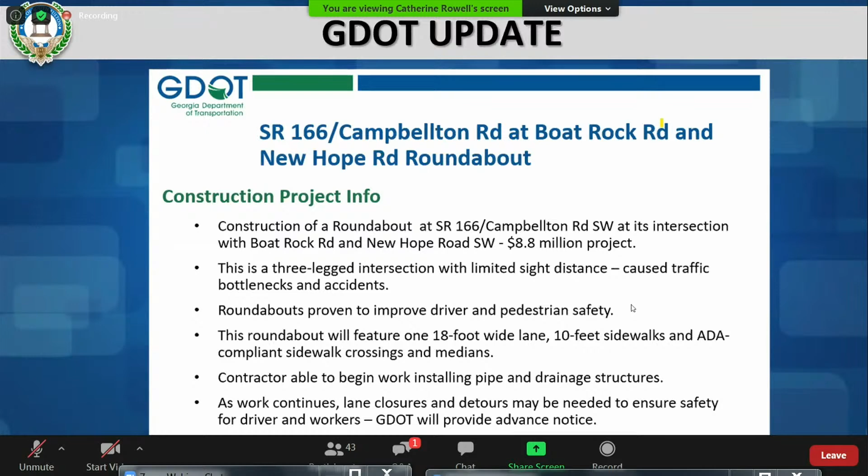Next slide, please. On State Route 166 in Campbellton, the recent progress has been grading in the roundabout area. Mostly we've been installing GAB and putting subgrade in that area to bring it up to grade for stage 1. In that area, we have closed off the decel lane traveling westbound leading to the intersection of Boat Rock Road, just so we can get in that area and install GAB.

As far as underground utilities, the gas company, Diversified, has completed most of the underground work on State Route 166 going eastbound and westbound. They're currently still working on Campbellton going towards Phillip Middle School. AT&T just started last week as well, working on underground utilities. They have a number of underground utilities to address, mostly on State Route 166 at the intersection of Boat Rock and Campbellton.

As far as the power poles, Georgia Power and East Point Power have completed all of their poles on Campbellton. Georgia Power just completed most of their poles last week, and they are completely done. Now we are just waiting on AT&T and other utilities to transfer their lines to those new poles. Next slide, please.

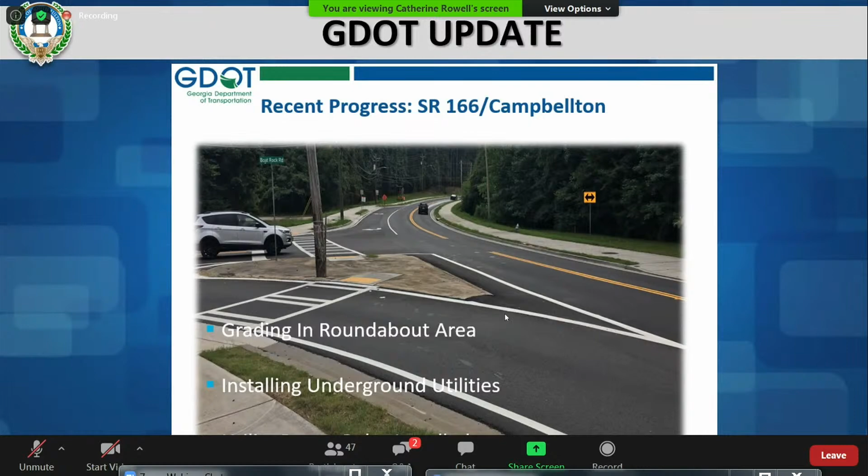These are some of the progress pictures we've been taking on Campbellton. On the left is the decel lane that was cut off so we can put our GAB in that area. Next slide, please.

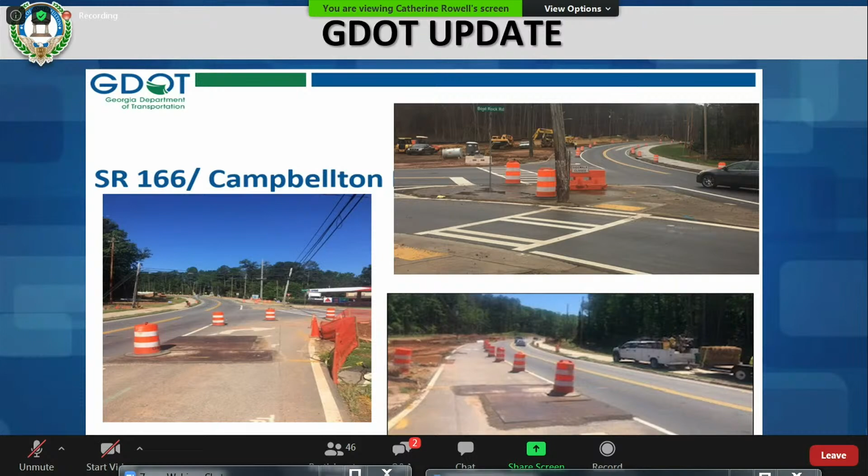Boat Rock, the recent progress we've done, was the first road we started construction on. We have installed sidewalk, curb and gutter, and a couple driveways on Boat Rock as well. Mostly we have the subgrade and GAB complete in that area. The only area that hasn't been done yet is the area that leads to the roundabout between New Hope and Boat Rock Road. We've been doing a good job of keeping this area covered, mostly because we've been doing a lot of grading, so it's a lot of dirt work.

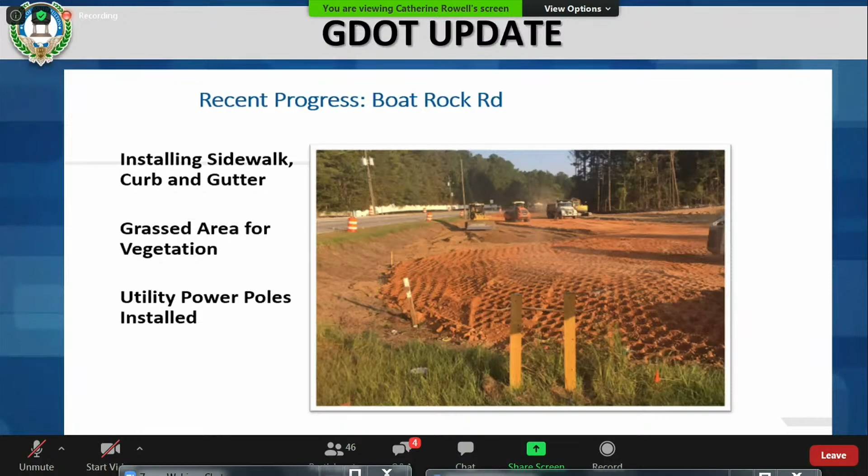So we've been doing our best to keep this area vegetated. Two weeks ago we put permanent grass in the area heavily, and I saw today that we have grass in that area. That's good, especially for this upcoming rain, to keep erosion down. The utility poles on Boat Rock, I believe, have all been completed, so there won't be any more lane closures on Boat Rock or New Hope. Georgia Power installed those poles, wood poles and concrete poles. They are currently done; there won't be any more need for them.

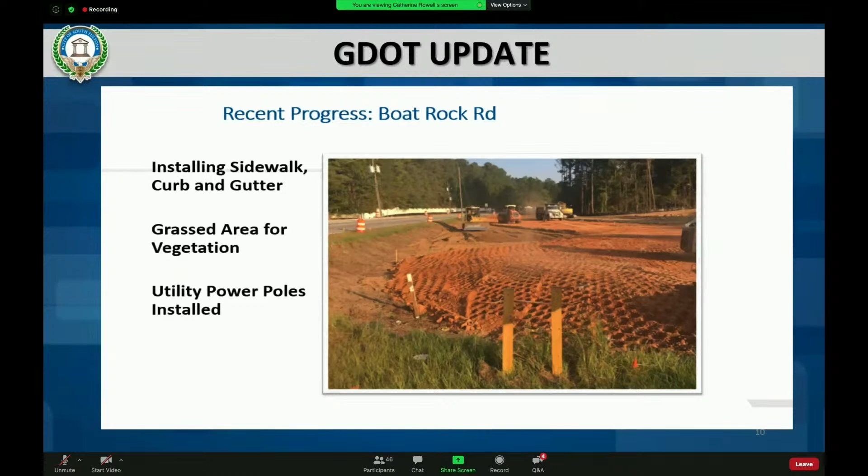Next slide, please. These are pictures of the recent construction. We've installed the new 10-foot sidewalks as well as curb and gutter. We still have a ways to go on Boat Rock Road, as you can see, but the new alignment is coming together. Once we get to stage 2, we'll be closing off Boat Rock Road and continue to bring that up to grade and install subgrade in that area. Next slide, please.

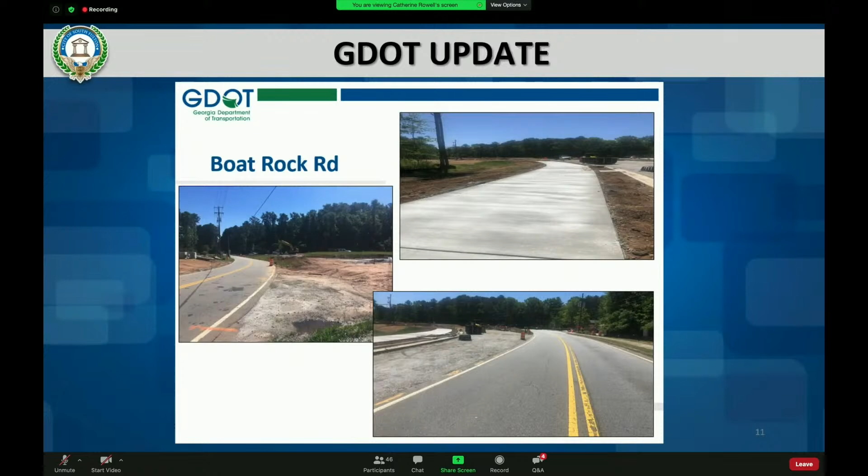For New Hope Road, we did a lot of construction in the month of May last month. Some of the recent progress was we began installing the GAB for the new alignment on New Hope Road, leading to the roundabout area. Our main focus last month was to get as much GAB and subgrade covered as we could, just to start the new alignment and make as much progress as possible. Things have been going a little slow with the rain, so we tried to keep that area covered as much as we could.

We've also installed some curb and gutter as well as driveways on that road. I believe the driveways are done for all the residential homes on New Hope Road. We still have curb and gutter that we have to tie from New Hope Road leading to the intersection of the roundabout and the old existing Boat Rock Road.

As far as the utilities on New Hope Road, all of the power poles have also been installed there. The last couple of months we had a lot of lane closures in that area causing some backup traffic, but that is done now. We are complete with the pole installation. Now we're just waiting on the other utilities to come and transfer their lines to those new poles.

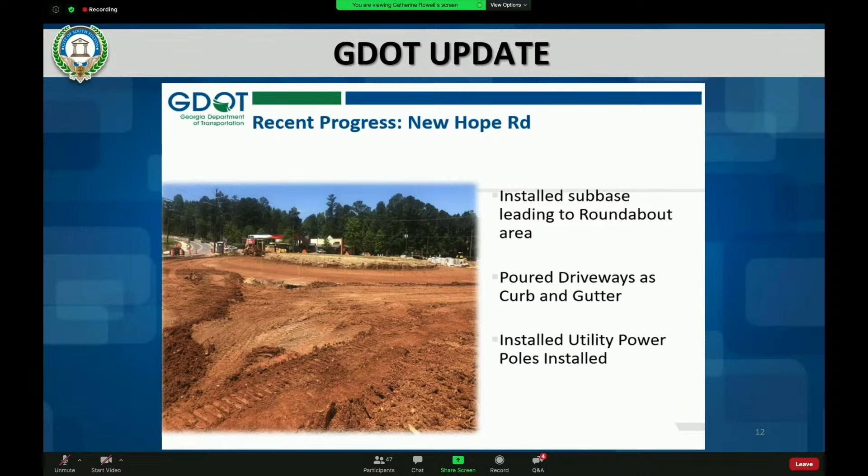So New Hope Road is still a ways away. We are still only in stage 1, so we still have some time to go on New Hope Road. Next slide, please.

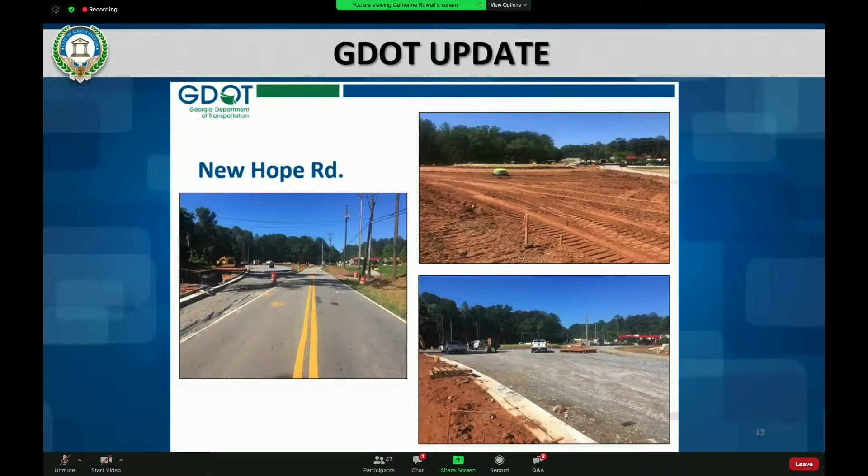For the next plan of action, we have water valve installation. We have installed 2 water valves so far, done last week. We still have 2 more to do in the road, on State Route 166 Campbellton, traveling westbound. Those will be done on weekends only, so we can make sure we have enough time to complete them and follow lane closure restrictions. We will give notice of when we'll be doing that so the traveling public can know, and we ask that people travel with caution through that area.

For State Route 166, we will continue grading, bringing that area up to grade. This is all for stage 1, being done traveling towards Phillips Middle School. They'll be grading, cutting and filling areas, bringing that area up to grade as we get prepared for stage 1 and try to transition to stage 2.

That is the update for the roundabout project that I have for you today. If you have any questions, please let me know. Please feel free.

We do have a couple of questions from the chat. The first one: will there be a traffic control device there? And how long do you anticipate Boat Rock being closed, and how will residents be able to get to their homes on the west side of Cascade where the bridge is?

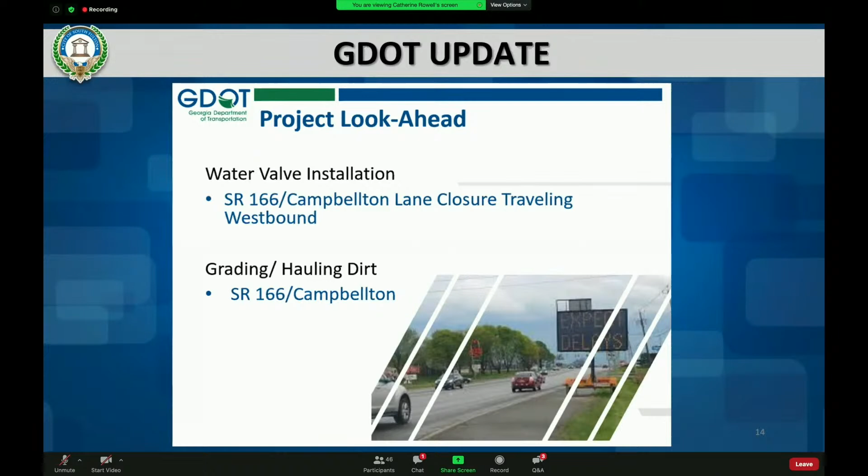Next, we have John Perlman, who is going to give us an update on Sandtown Crossing 2, a project we've all been anticipating and watching the construction continue over the last couple of months. So, John. Thank you, and good evening, everybody.

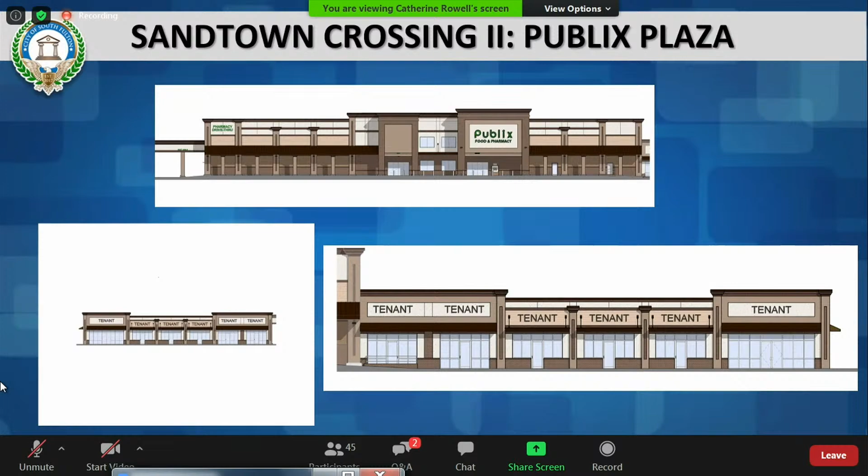We are very, very happy with the progress we've had here. These are renderings that we showed you when we started. Ruth, let's see what the next slide might be. There's an aerial photograph that we took on Saturday. Since that time, we have begun paving.

That just shows the graded aggregate base, GAB, same stuff the DOT guys were referring to. You can see the buildings are finished as far as the shell, the roof is on, and the air conditioning has started being placed on the buildings. A lot of people are asking where this is going, and now you can sort of get a feel for where exactly it fits.

There's a new main drive straight down the middle of the property into the shopping center. We have a new secondary road out to Riverside on the north end of the property, and we also have the existing Camp Creek road, which has no curb over there. So you have a new access point a little closer to the front.

That's our new access point, so it'll be a new road leading directly into the property. You can see from this picture that it's clearly the road designed for all the truck traffic. We're hoping the trucks will use that as their main entry to make deliveries to the Publix.

Our scheduled delivery date to Publix is the 22nd of September. We had a ton of delays for weather, as you know it rained like crazy in the fall and winter, but our contractor was able to make up most of that time and keep us on schedule. Publix generally takes a month or so after that to get ready for opening, so we're still targeting opening around the first week in November.

Nope, no, that's not it. Hold on one second. That's a beautiful residential property. Yes it is, that's our next slide. Hold on one second.

Let me talk a little bit about leasing while we're waiting for the pictures, opportunities for entrepreneurs to lease retail space. We are eagerly reaching out to the community in every way possible to have entrepreneurs come along and open up quality businesses in the shopping center. We have mentioned a thousand times that UPS Store wants a location here, they're looking for a franchisee. We have a couple of leases signed so far.

Our existing nail salon in the shopping center in front is going to expand its space by 50%. I think everyone will agree that's kind of nice right now in the era of social distancing, to have a little bit more room between you and the person in the next chair. We have a signed lease with a personal chef who does catering, cooking classes, and parties within his space.

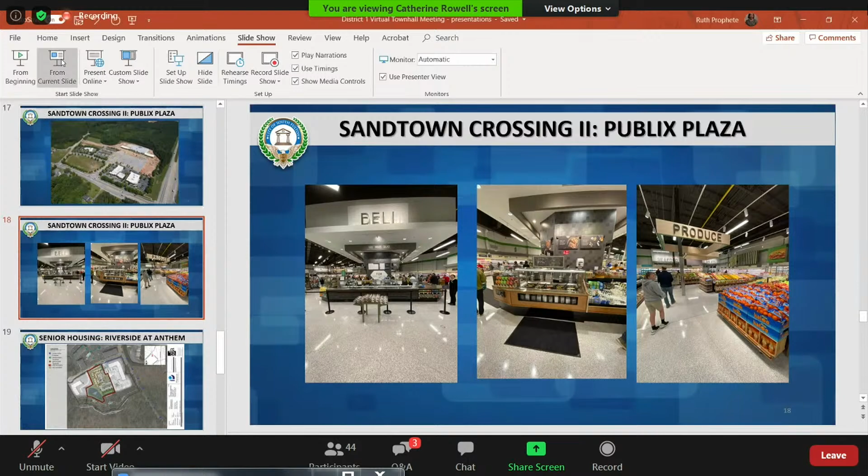We expect to have a lease signed in the next day or so with an AT&T store. And we're negotiating a letter of intent with a couple of guys who live within a couple miles of the shopping center that want to open up a Caribbean restaurant. It would be primarily a takeout restaurant, since everyone's trying to figure out the new rules.

Well, let's go back now, we have the pictures up. This is a picture of the deli department and the produce department in the store in Beaufort. Ours will be very similar.

They're going to start on this terrazzo floor in the next few days, and at that point all work inside the store stops, because that takes about a week and nobody can walk on it while it's getting finished. Terrazzo is basically marble chips encased in some kind of material. It's indestructible and easy to keep clean.

You see what the next slide looks like? This is the extent of those pictures we were able to put here. So from the images you sent, yeah, this is what we have. Anyway, you can see it's got a nice high ceiling, and all the different service departments are going to be there.

So we're very excited about having a new supermarket in the community to serve the needs of the community.

So back to the leasing, we have, as I mentioned, four spaces taken. We still have quite a few options for people that want to open up a business, and they may feel free to call us, our number is on the sign: 404-255-7535, press extension 5 for leasing. My son Sam handles the leasing, and we'd be delighted to talk to anybody about their ideas.

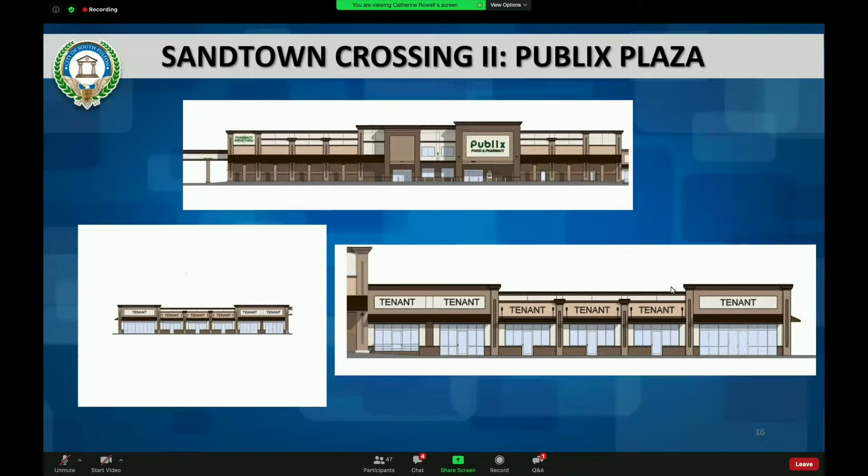And the end cap on the eastern end—Ruth, if you could go back to the aerial photograph. Now move your arrow up a little bit, left, move to the left... right there. That end cap is 2,100 square feet.

It's designed for a restaurant. It'll have about a 1,200 square foot patio next to it, and we'd love to have a quality restaurant go there. The problem is the COVID-19 pandemic—nobody knows the ground rules for when they can open, what they can open, how many they can seat. We need this to settle down a little before we'll get a quality restaurant ready to take on that space.

So between that space and the other one that's leased in that building, there's 5,600 square feet remaining.

Another question popped up: where will the drive-through pharmacy be? Ruth, move your cursor to the left... no, go way back to the building, the Publix building... right there, that's it. That is exactly where the drive-through is—between the left side of the Publix building and the 9,000 foot shops building next to it.

You can already see we're building the roof over the drive-through now. So anybody coming into the shopping center, signage will indicate that they loop around to the back of the building on the left and come around through the drive-through.

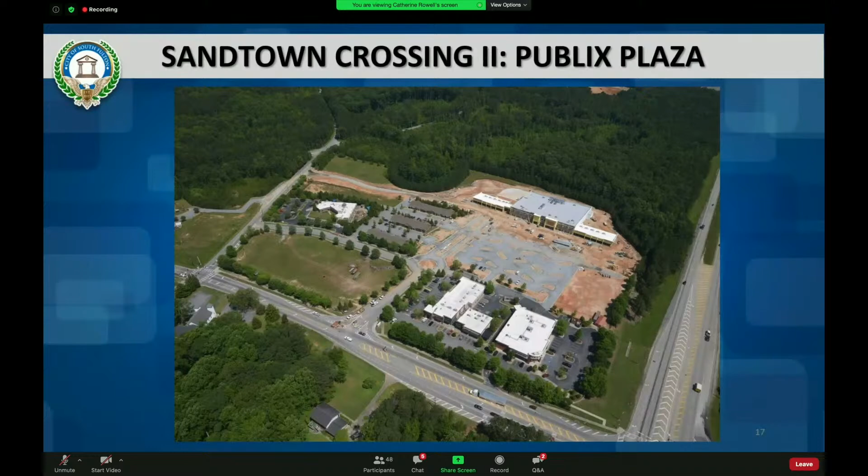The next project we have up for an update is the Riverside at Anthem, our new senior housing development coming on Riverside Drive. Edric Harris, or a member of his team, will be presenting that information.

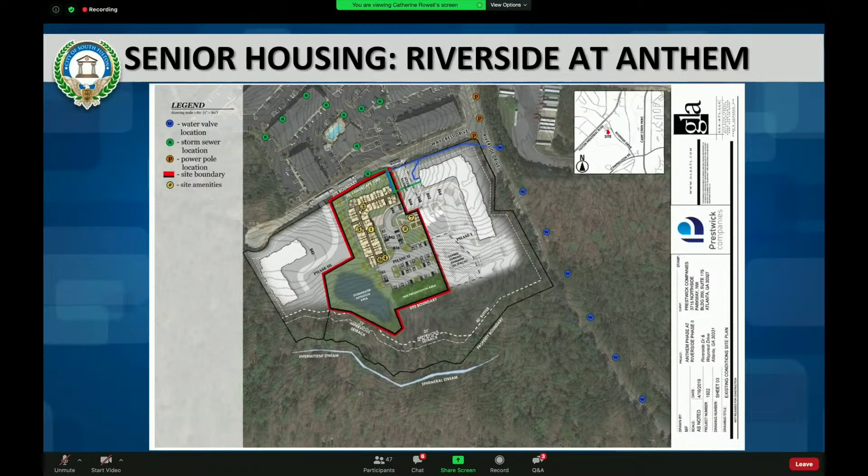So we're projecting to have leases start, or move-ins I'm sorry, in November. We'll start pre-leasing, or accepting applications, 90 days prior to that—so about August we'll start accepting applications. And I believe if you go to the next slide—can I go to the next slide?

And here's the renderings of our building, what it's going to look like, one of the buildings.

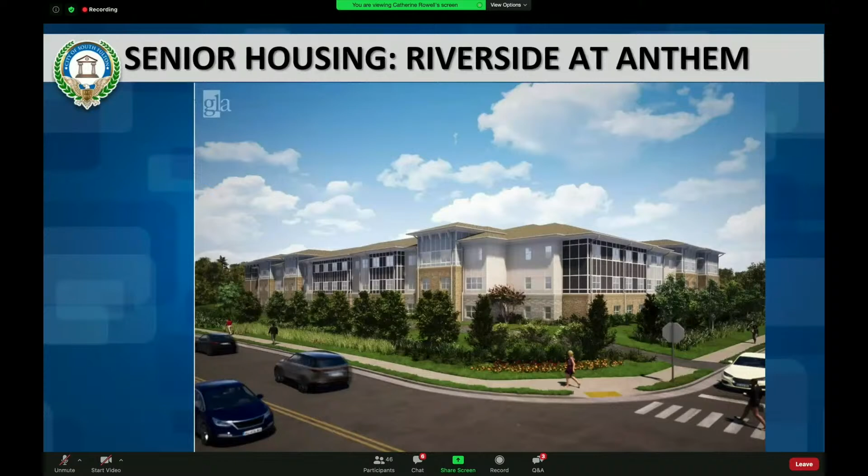One of the questions we have, Mr. Nixon, is what are the price ranges for the units? Right now, I don't have the answer to that question. I can have that next time. We're still working on that. We're still getting our UAs, or utility allowances, but we'll have those prices next time if we're invited to present again.

Of course, you'll be invited back, and we'll be happy to share that information out as you finalize those marketing materials. We'll make sure we circulate them.

I see another question that came up: what is the age range? I believe this is a 55 and older senior community. So it's active adult living.